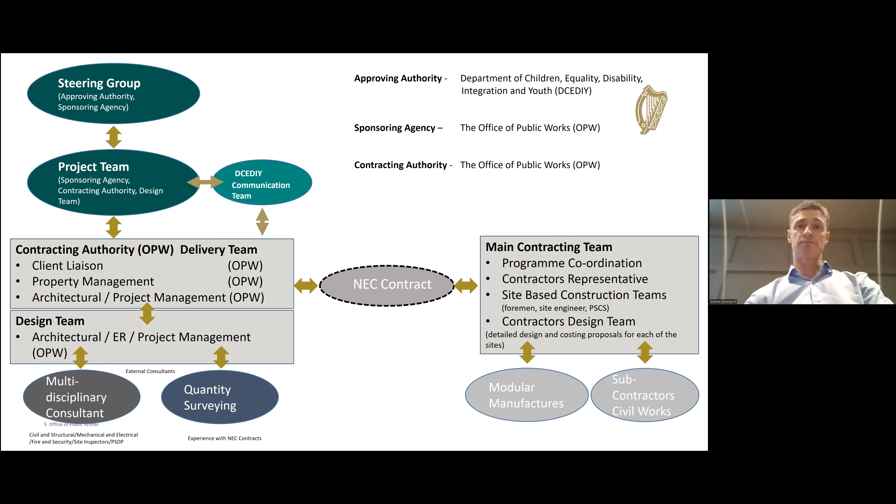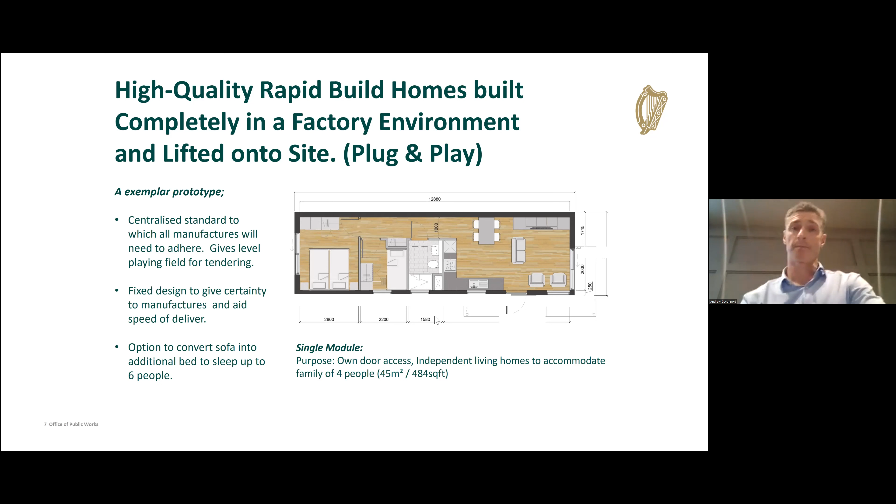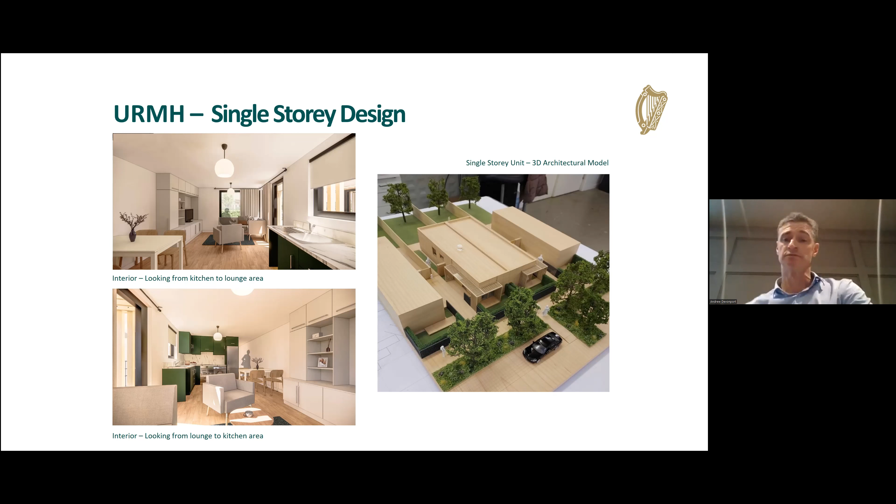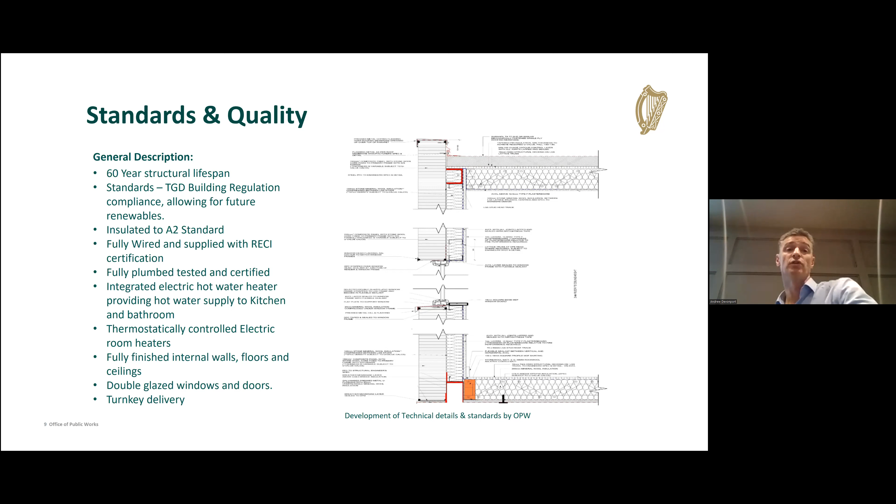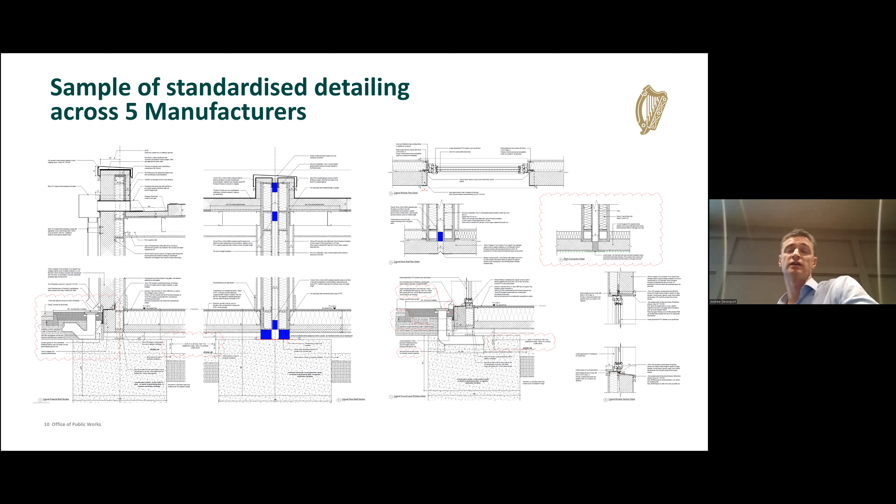While the site is being enabled in terms of the public realm, these units are being built in a factory environment. Improved health and safety, and quality control is a higher standard because you are in a factory environment. You're not exposed to the weather, and there's obviously good supervision in those environments. It's a fully portable home and reduced wastage. Those are the advantages of the 3D volumetric approach.

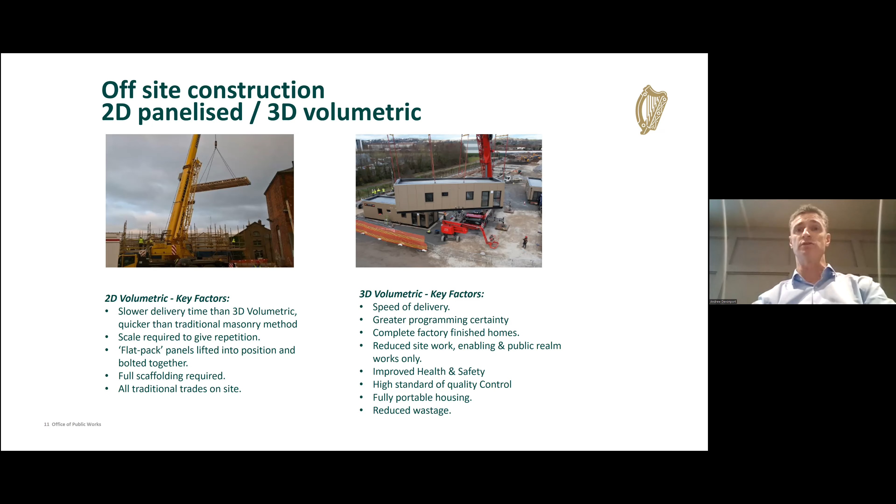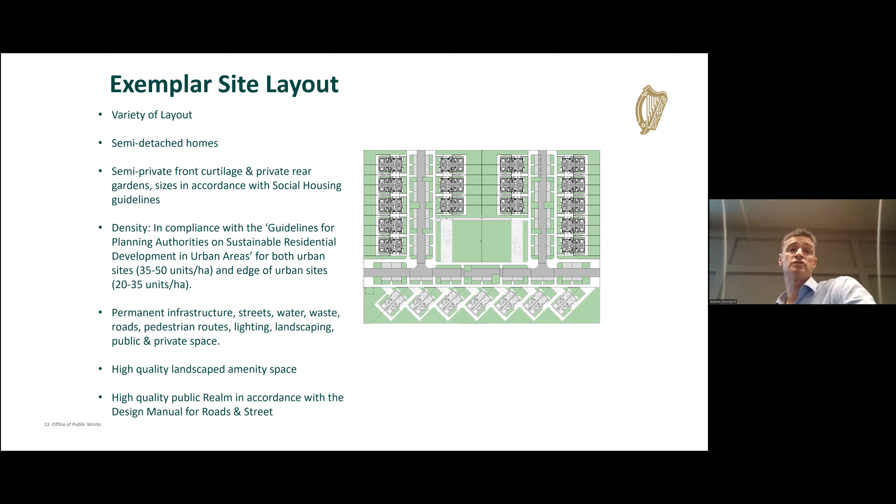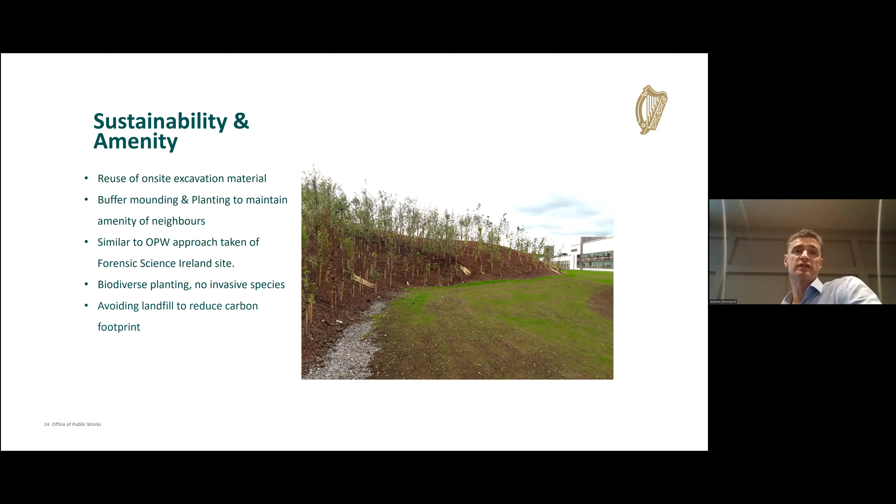And in terms of the sites themselves, so this is the Mahon site. You see the layout. The layout was generated, one, by the shape of the site, but also by the abnormal on the site, which was knotweed. The site had a high degree of knotweed, and the most cost-effective way to deal with that is to bury it. So those brown areas, which are landscaped now, that's where all the burial cells are for the knotweed. So that influenced the design, if you like.

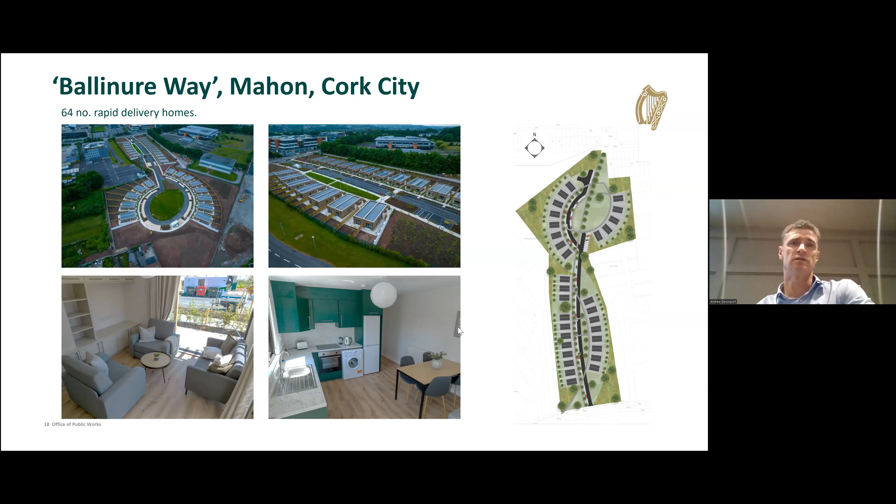Just going forward, the images at the bottom there, you might recall they're the CGIs from the model, so you can see they are very similar. And this is just the image of the street. These units are only single-story units, so they don't hold a street. So what was key to all the designs is the verge. So in time, those trees will grow and develop and give you that tree-lined avenue.

And then in terms of all schemes, where possible, have open space in terms of public open space. So that's just the green, and then the entrance, concentrating on the entrance, just relatively cost-effective measures to make it more of a home, with the canopy, the glass rain screen over the door, the letterbox and the numbering, just to personalize it a little bit.

And again, the internal views of what they all look like. So all these units are all identical inside. Obviously, the consistency was essential there to keep the costs down and to keep the manufacturing a fast process. And just some evening shots, showing the public realm. And this is Doorly Park again, just an aerial shot there where I think it shows it nestling into the environment.

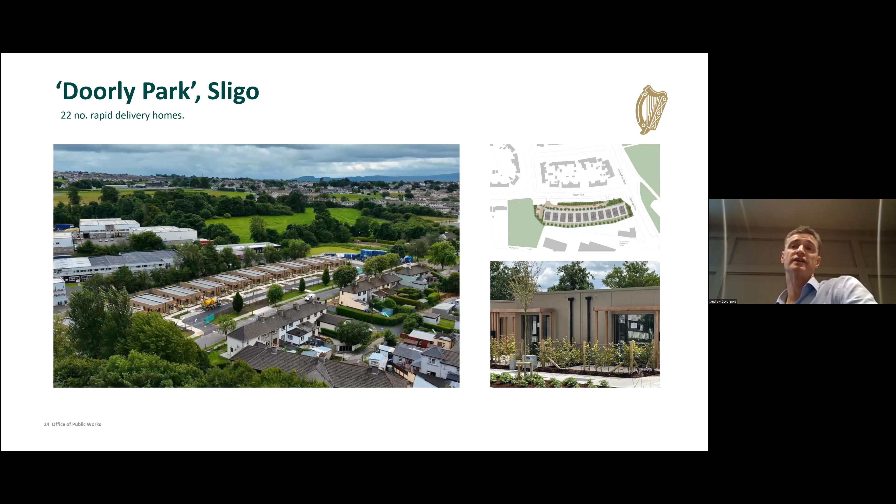Doorly Park was a tight site. There's 22 homes on there. To maximize the open space, it was designed as a single road carriageway in, and a separate exit point, just so it wasn't all hard standing, to maximize the green area. And just some further images of Doorly Park. And again, Doorly Park in terms of the bed planting, the concentration on bed planting. And as I mentioned, the approved housing body will be managing this. This won't be managed by the local authority.

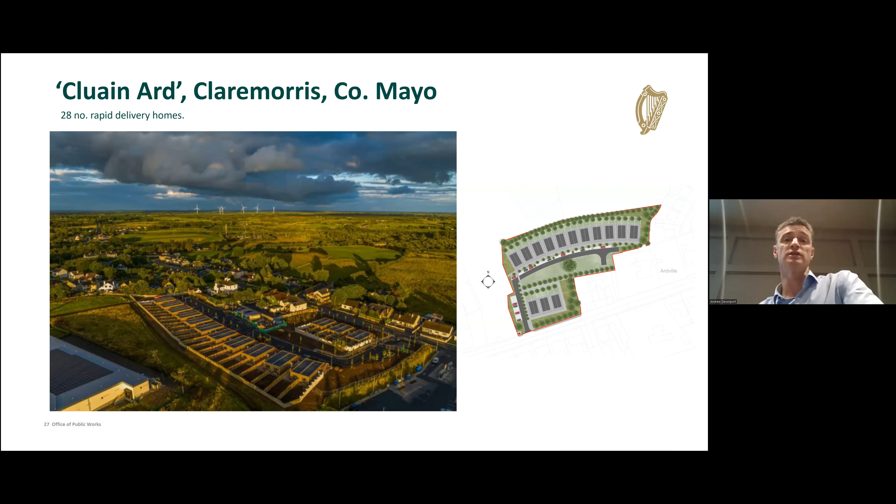And then the Claremorris site, Mayo, there are 28 units there. Thurles, there are 62. Whilst the design changes, the palette of materials is constant. Again, that just adds value. This is the Farnham Road, Cavan. The layout of that was really dictated by its setting. Well, it's just outside of the floodplain, so that's why the shape of the site is like that, because obviously we couldn't build in the floodplain.

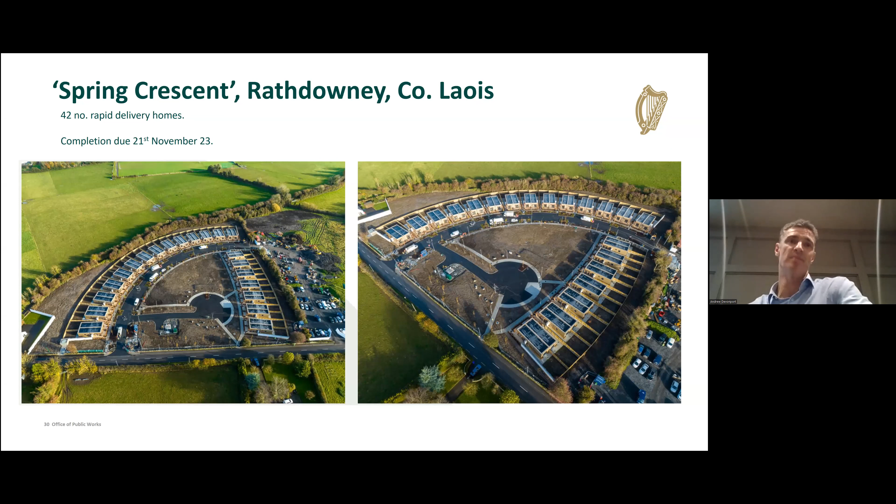This is Rathdowney. So this will be due to hand over in the morning. We do have a bit of an issue in terms of the wet weather we're having at the moment. So the landscaping hasn't matured. The grass hasn't seeded. So that will be an ongoing process, maybe into spring. But the units will be occupied, and the open space will just be temporarily railed off until the landscaping has a chance to establish itself.

This is Clonminch there, Tullamore. Again, an interesting site. Tullamore, Tullamore Dew is just behind the site in terms of the distillery.

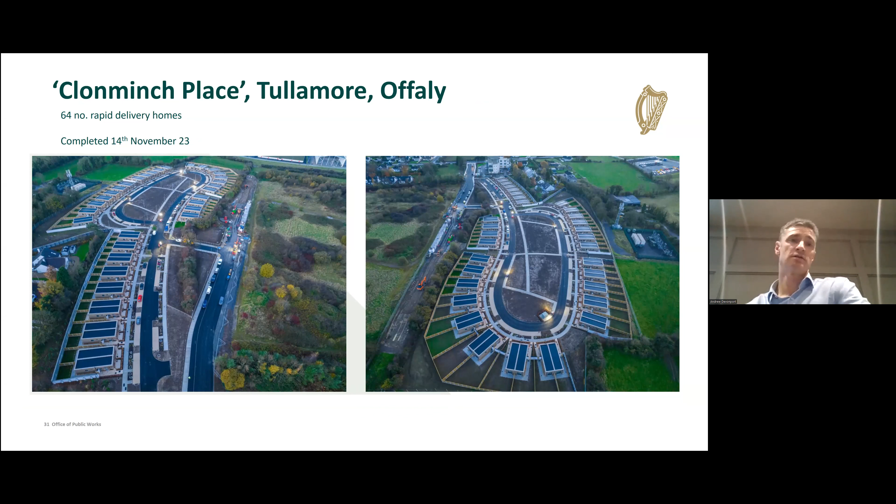Backweston, Lucan. So that's 132 units on there. What was interesting on this site, we have been approved to bring forward the 2-story units. So on this site, we are bringing forward, as a proof of concept again, 12 units, which is the dark blue, as you see there, just opposite the other side entrance.

So these would be more traditional, like 3-bed family units. And this is maybe a proof of concept, which would be a bonus nationally, for our own issues with our social housing and housing generally.

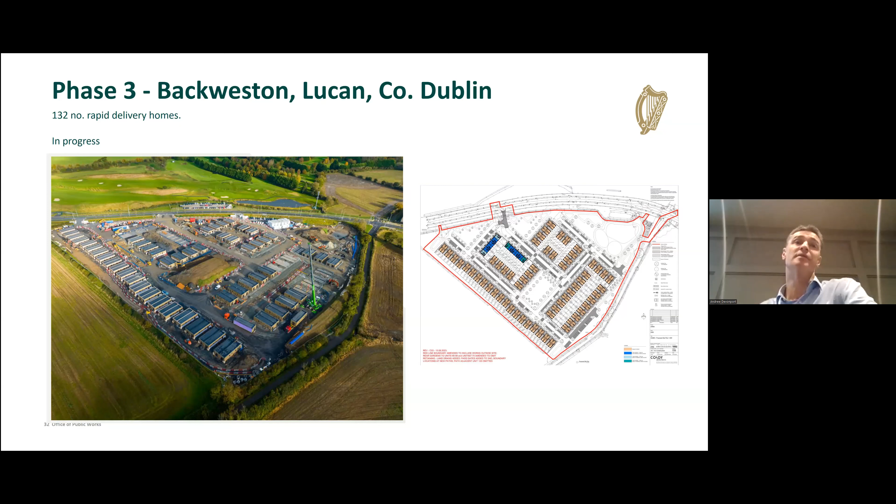So just in terms of the factory output, the acceptance and monitoring, this is how we track the outputs from each of the factories, and then the actual input from the factory onto the site, and the coordination and the tracking of the units from the suppliers. There were 5 factories. 5 was picked to de-risk the process, just in case 1 or 2 of the factories underperformed.

Some of the factories here started life building bathroom pods. That was their day business, and they have invested and upskilled into this process. So there were a lot of promises early on. That's why I went with the 5, because those promises may not have been realized, but as it happened, everyone has stepped up.

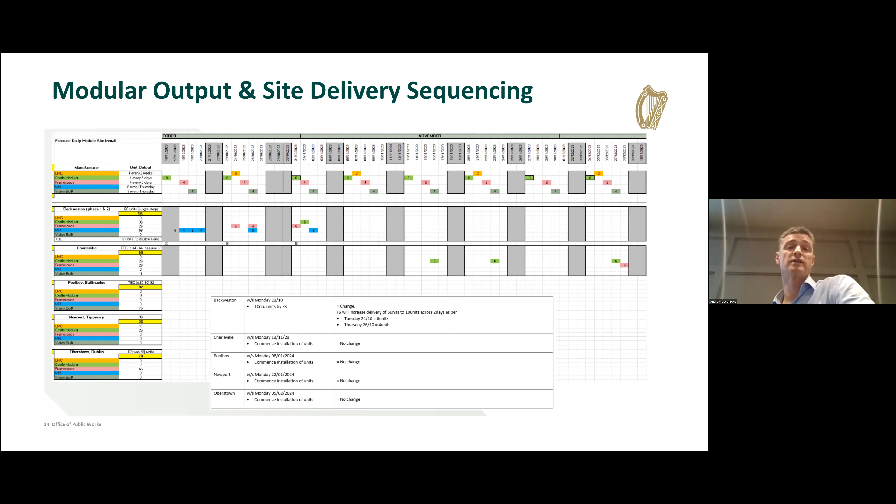So in terms of the quality assurance, obviously that's key in terms of our process. So there's a lot of oversight in the factory quality checking, like staged processes between each of the elements, so the factory has its own quality team, there's the contractor. I guess Sisk has its own managers, Atkins has its own consultant team. There are the BCAR inspections, and then our own inspections.

So there's a layering process of visits within the factory where the quality is checked. Each element is signed off by an individual in the factory, so it's all traceable back to that individual. If a fault were to arise, then we're able to track back and see who worked on it, who installed that piece of insulation or roofing membrane, and go back to that individual, and if necessary, retrain that person.

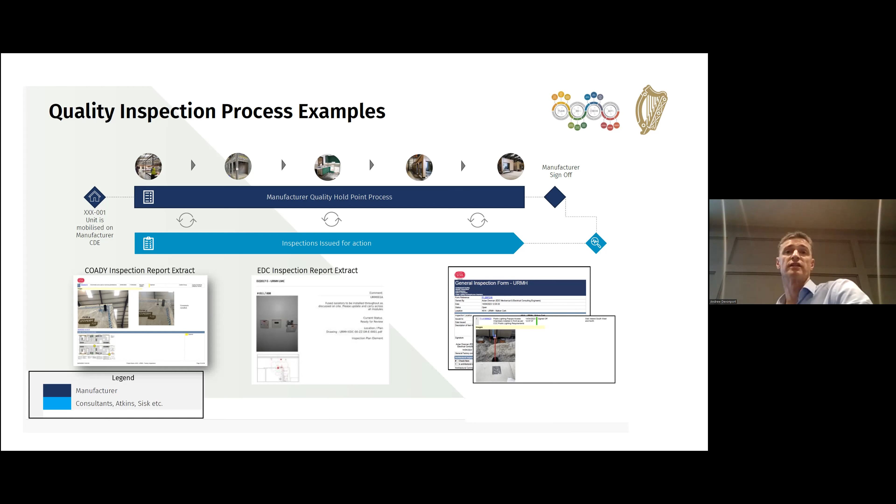Again, just these examples, the consultants who came with the contract, Atkins, with COADY in terms of architectural, EDC, M&E. So they are carrying out inspections across the 5 factories. And this is just an example of the monitoring of which unit goes where on a site. There's Castle Modular there, and then there's MHI. So you can see the tracking process.

Once it hits site, you have a process of building in terms of the flashings, cappings, air tests, the acoustic tests, all that necessary work to happen on each of the units there before it's completely signed off.

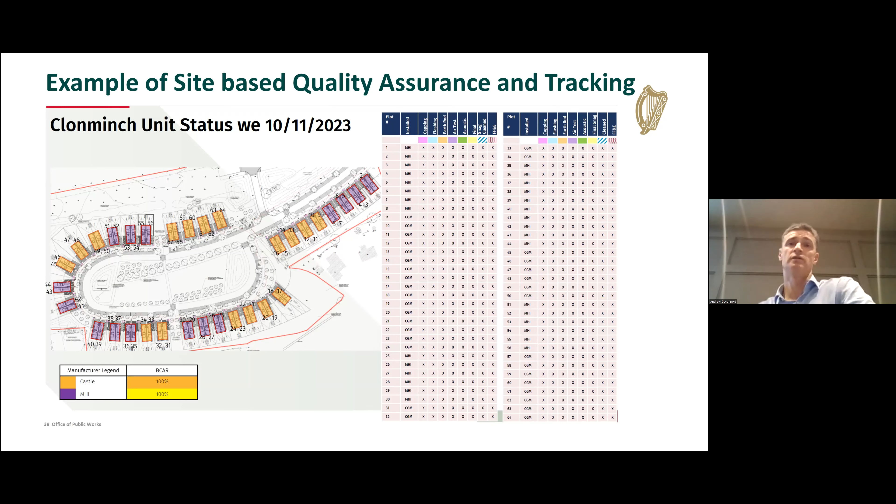And in terms of the multi-story unit, as I referred to earlier, this is what the factories are just starting their production on. 2 of the factories are building those out. They would be Castle Modular and again Frame Space. So these are 4 modular volumetric units, which would give us 1 house. So instead of 1 modular unit, 1 home, these are 4, obviously bolted together on the site. And you can see the size of them.

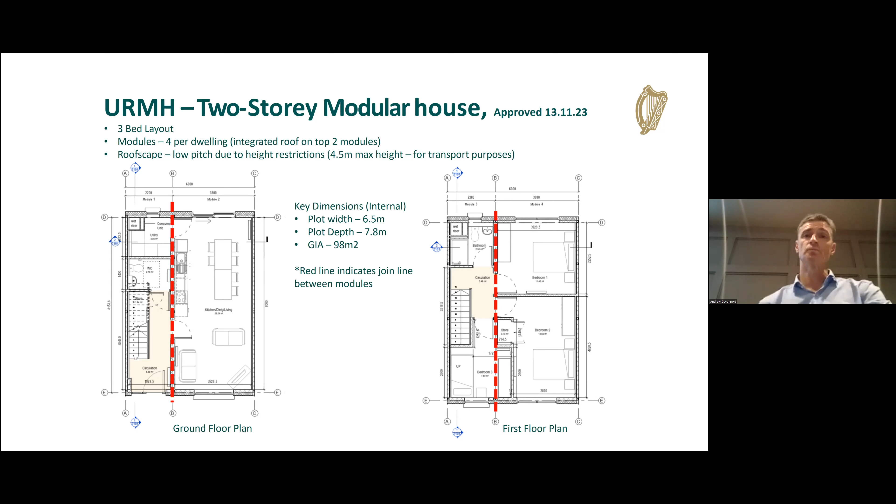So this fully complies with the social housing guidelines of 98 square meters for a 3-bed, 5-person unit over 2 stories. Just on the section there, you can see the limitation. The mono pitch has been chosen to keep the modulars down.

If we were to put a more traditional pitched roof, that would get us into 6 modulars, which ups the cost of the unit, because all of a sudden you're delivering 6 modulars per house as opposed to 4, and you can see the height restriction in terms of the factory, and then getting that on a truck. But we have achieved the higher floor to ceiling of 2.5 meters on the ground floor, just to give that greater sense of space within the home.

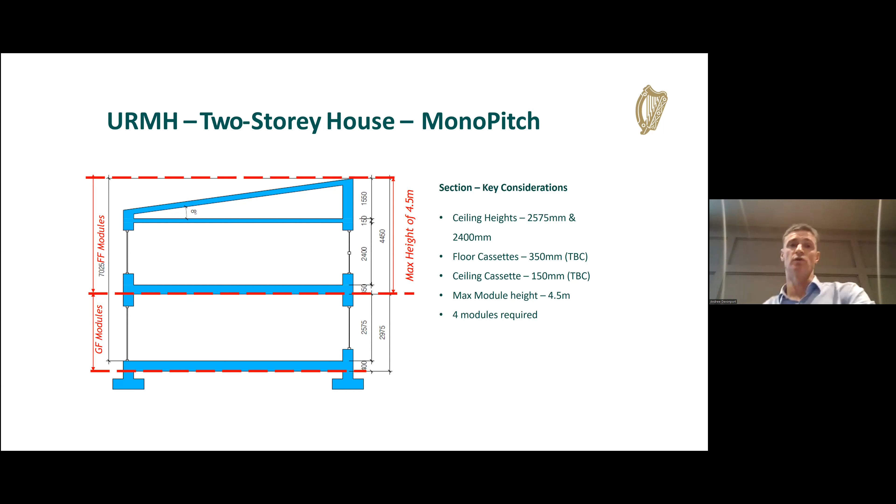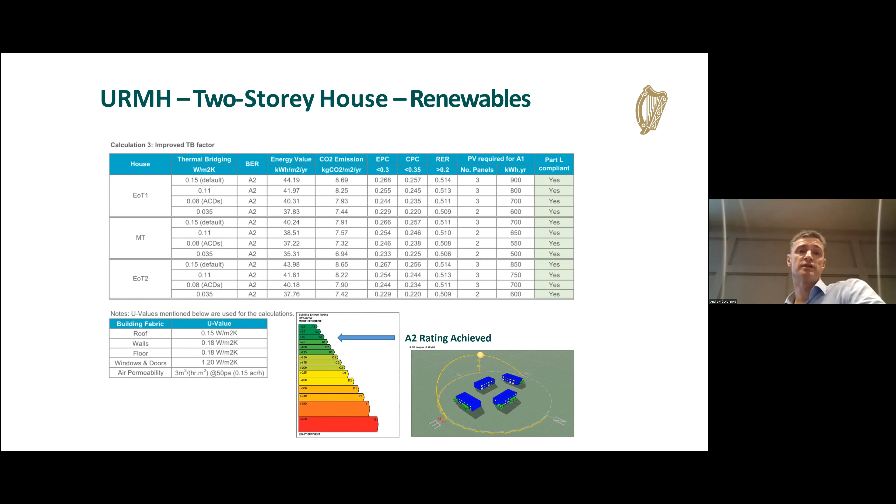And this is, sorry, just popped on. And in terms of the A2, the 2-story rather, the renewables. Again, it's A2 BER, so you can see the metrics in terms of the U values and where that is. So they are being fully worked out.

And then just in terms of the mock-ups, again, learning within the factories, bringing the factory with us on a collaborative process. We asked them to mock up some prototypes, just so we can actually see the detailing, see how the units are going to be connected, and the junctions between the four modulars as they are stacked and put together.

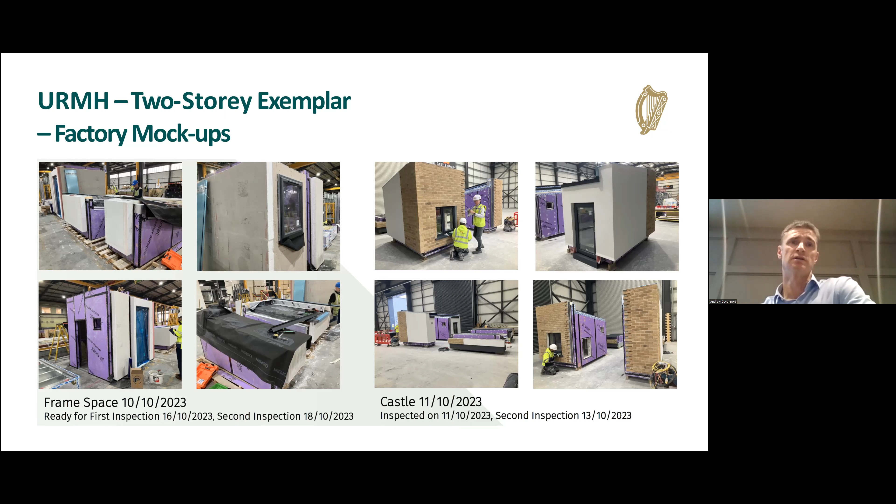And I suppose the one thing is that these are all Irish companies, and that was seen as a benefit, because they get jobs there for the area. So that investment has stayed in this country, rather than maybe buying in these modular units from overseas.

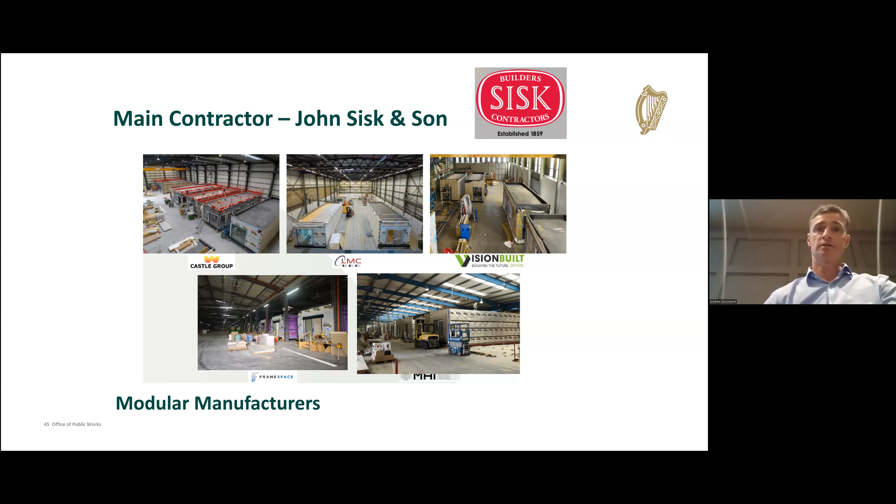Okay, so the benefits. They reduced the time on site, I guess 7 months to deliver the 64 units, and that's with sites with abnormals. All these sites have issues, from archaeology to needing to bed underground ESB cables, or knotweed, as was the case in Cork.

So the design solution used here was light gauge steel, but it could easily be timber frame, like mass timber, or any other method. But I suppose we went that way because there was a gap in the market. The timber frame manufacturers were busy doing 2D volumetric. So light gauge was the route we had to follow. But as I say, it could be either or.

So we feel that we've activated additional capacity within the construction industry in terms of the factory environment, like the semi-skilled workers in those environments, rather than what is out there, a shortage of tradespeople on the sites. So I think in the case of these five, we've taken that industry from its embryonic nature and turned it into a full production industry.

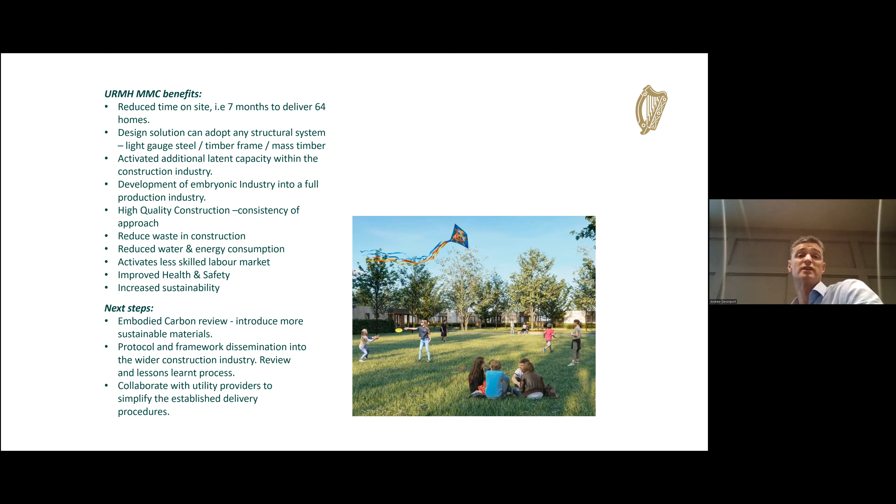And I suppose the key partners in this, which have to be mentioned, are the utility providers, Irish Water and ESB, who worked with us. We approached them and asked them if they would work with us closely, because to deliver the program at the speed we have, we would need Irish Water and ESB with us. And I have to say, they have worked with us, and they have unlocked certain blockages to allow these units to be built across the various sites, which, as I said, all have their own issues.

So I think that's probably the end of the presentation. So there's a lot in that. But obviously happy to take questions.